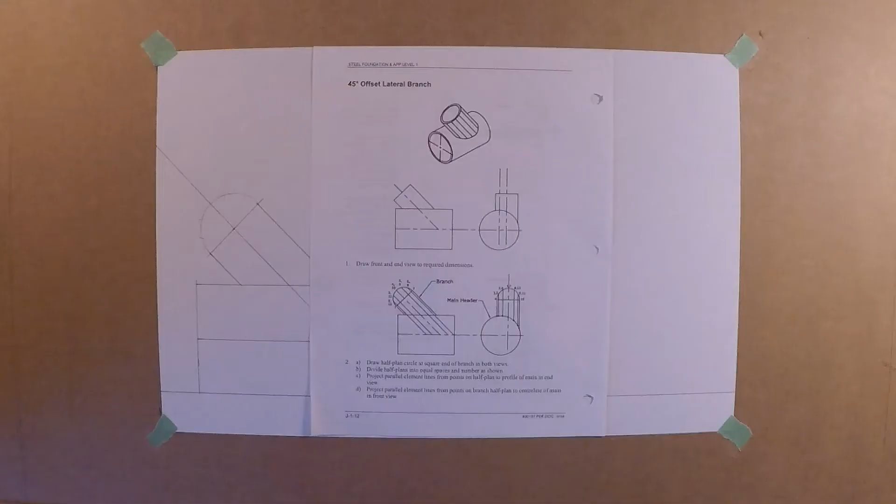Drawing 5, 45-degree offset lateral branch. Very similar to the last one - it's on a 45-degree slope to the main body. They call it the header. But this one's going to be offset, off center. So it's twice the work to make the stretch out for this because it's not symmetrical.

So there is a step-by-step here on page 12. You can go through, and we'll use the same numbering on the way through here. And on page 28, just below number 4, we've got number 5. We're going to use all these numbers on here.

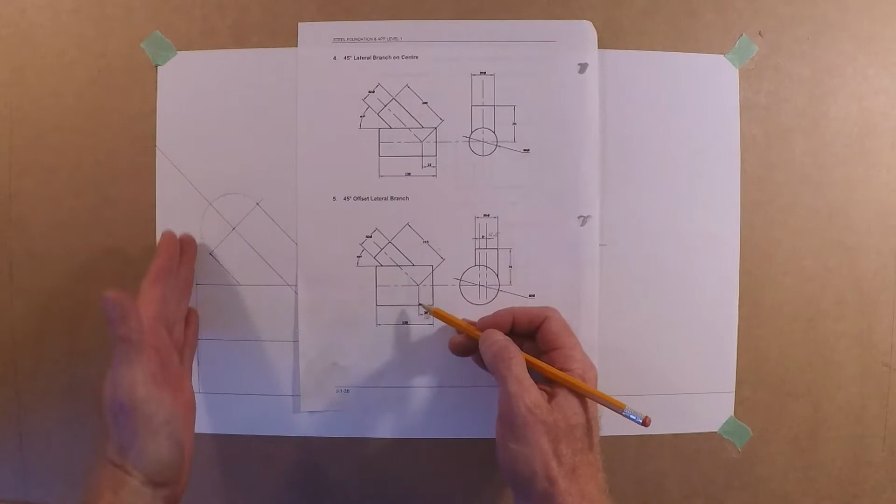You're going to change up a couple here. Instead of the 30 here, we'll use 10 just to pull this back a little bit so it doesn't overhang so much on one side. So we're trying to save a little bit of space on the paper. And instead of the 8 millimeters here, we want 12.5 - that's really important there.

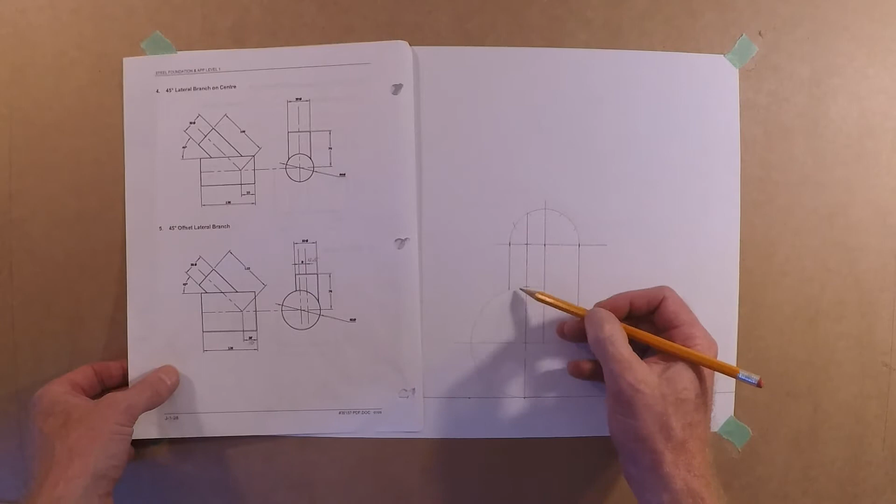We pulled it back, and the reason was because this ended up landing on center, which just eliminated an extra line on here because it's going to get really busy with lines. So we need to drop all these element lines down. That helps with that. The rest are good here.

So pretty similar to the last one - 120 for the length here, 115. That's going to work. I know the last one was 100; this one's a little bit longer.

It's an 80 diameter and a 50 diameter here for the branch. Now this height here of 70 really doesn't matter because it's just element lines anyway - we're not taking any lengths off of here. It's just an intersection. For this one here, we're going to do the same.

We're going to try to put this pattern off on this slope here, the same as the last one, and do the whole pattern, which isn't going to be fun just because of the amount of measuring and stuff we're going to have to do here. So let's get going.

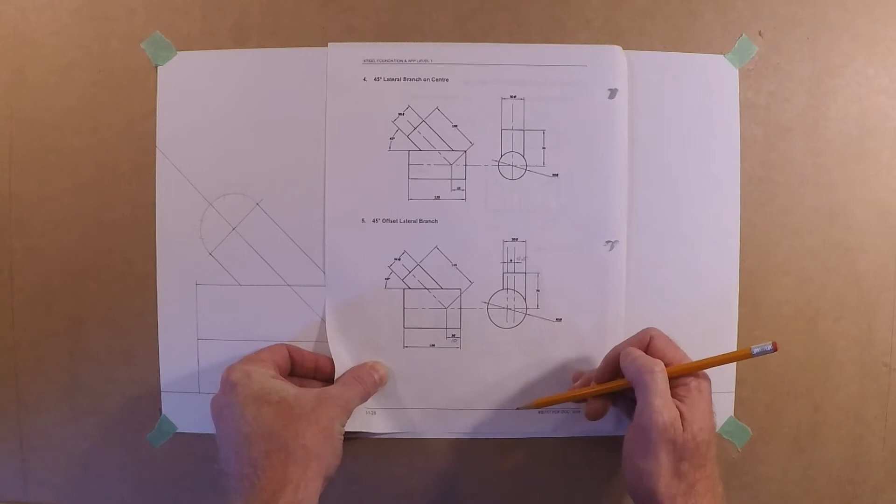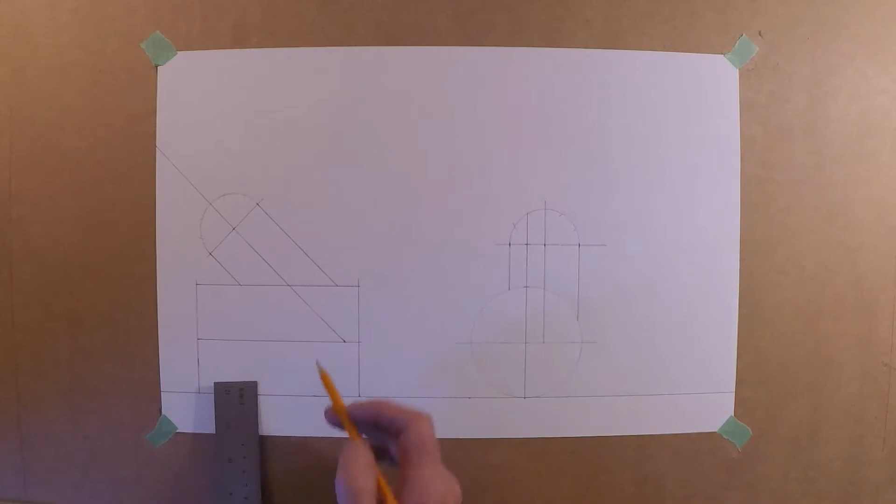So I've drawn a little bit already just to save some time here. The baseline we're going to do the same - we're going to come up 30 with this baseline. It's going to get real close here trying to get this whole pattern down, but we're maxing out this page. So 30 for the baseline for that, 30 for the base, and we're going to come 30 over.

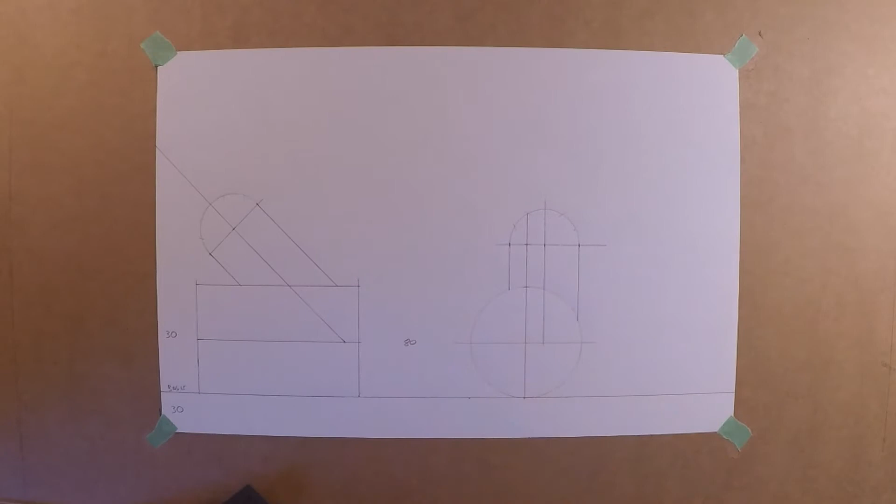And 80 in between - I've shoved it a little bit further that way, so 80 in between there. Go ahead and just double check, make sure everything's correct. You've got your 80 for your diameter, and your 50 for the diameter there and there.

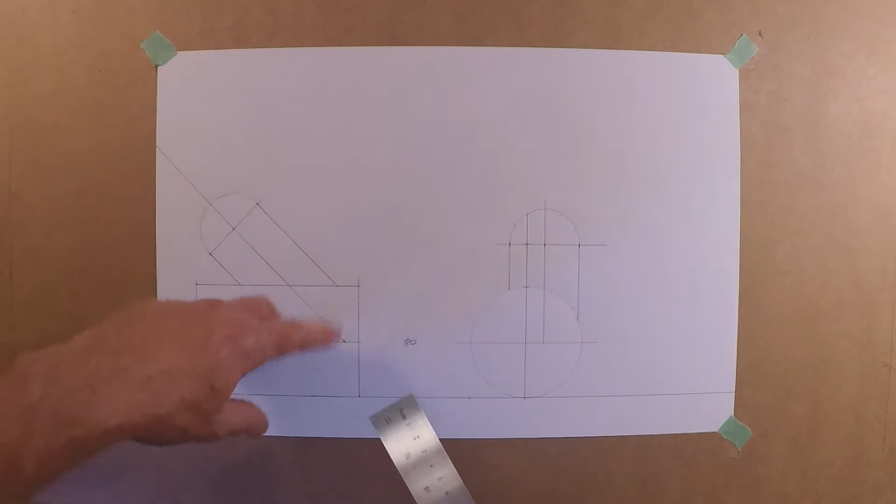You've got your 115 here. So that one's accurate, yep. This is on the 45, so just double checking that. You're going to need these half circles here coming off either side just to get our element lines on.

So let's get going, we'll do this pattern here first. Let's bring these down to the cylinder, and the outside one where it touches - that's it, that's done.

The next one here, like I said, just where it touches, and we'll number these later. I don't get all tangled up in the numbering here sometimes - sometimes I don't even number. If you don't have to, I don't even worry about it. But the numbering confuses a lot of people - it even confuses me sometimes. It's a lot of numbering.

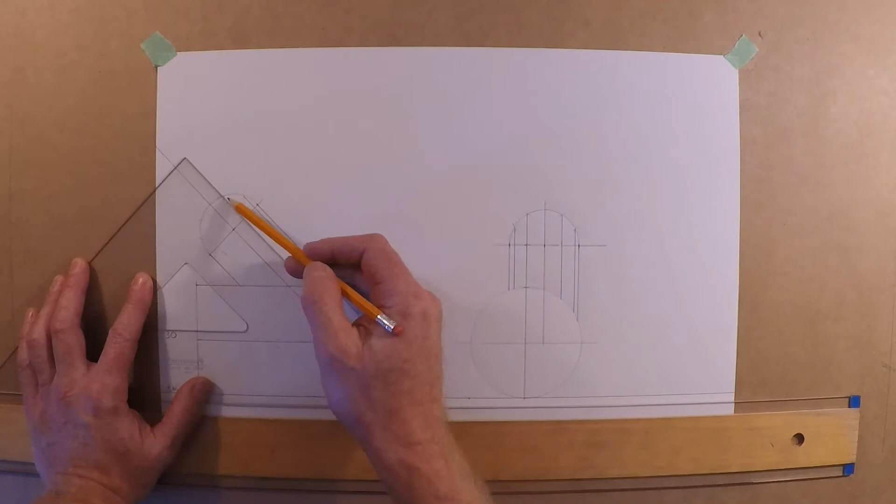Sometimes it's easier just to go down one and over one because we're just making a graph pattern anyway - parallel line development. Just making sure each line intersects the correct line. We call this parallel line just because everything's parallel line to the line beside it. Parallel line is mostly used for cylinders, anything round that's cylindrical shape, as you can see that we've done here so far.

Cones are round, but they use radial lines, so that's next year in level 2.

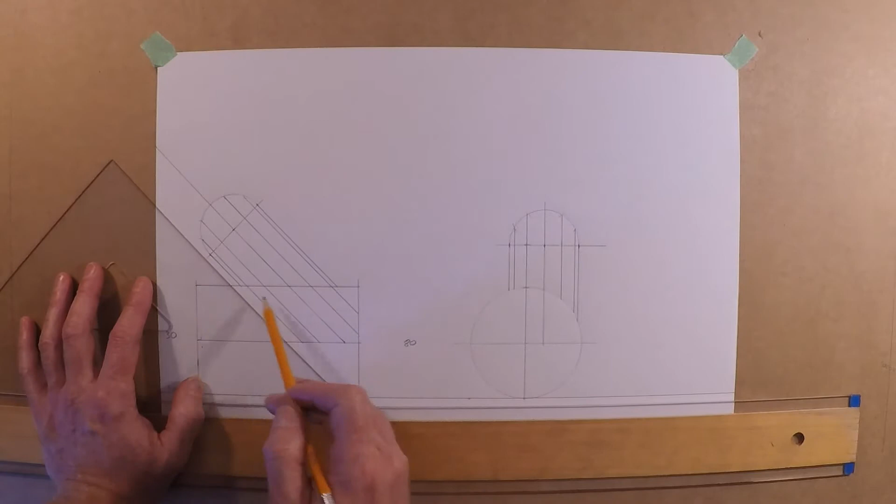Yeah, I just brought all those down there. So the top ones are good at the top there, and then we'll bring these over. This is where it's going to get tough, just because the lines are so close together.

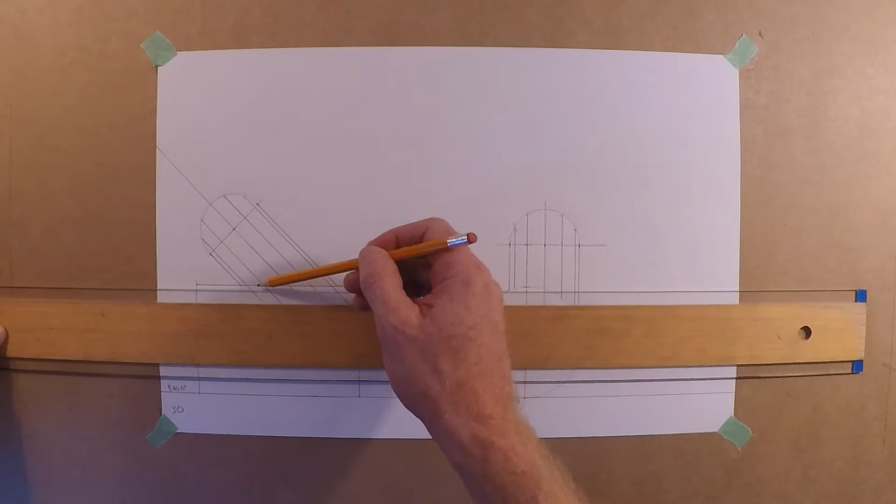So with this outside one here, as it's flipped, that'll be that one there in the center. Again, just making sure you're as accurate as possible - these are going to get real close, really close.

That one's on the top there, and then the top is the top. So really no need to bring that one in, but that is up there. So you can see how close those lines are - they're just extremely close together.

Even this one here, it almost looks like it's right on top, like it just pretty much lines right up. Not going to be much of a difference on that one, so I'm just going to share that one. Looks pretty similar in distance here.

The distance here and the distance here, it's going to be split. It's almost going to be unnoticeable down below there, so I'll just line that one up.

If I did this on the computer in AutoCAD, obviously it would be a lot more accurate. This one here we're dealing with trying to measure in pencils, and it gets pretty tough sometimes.

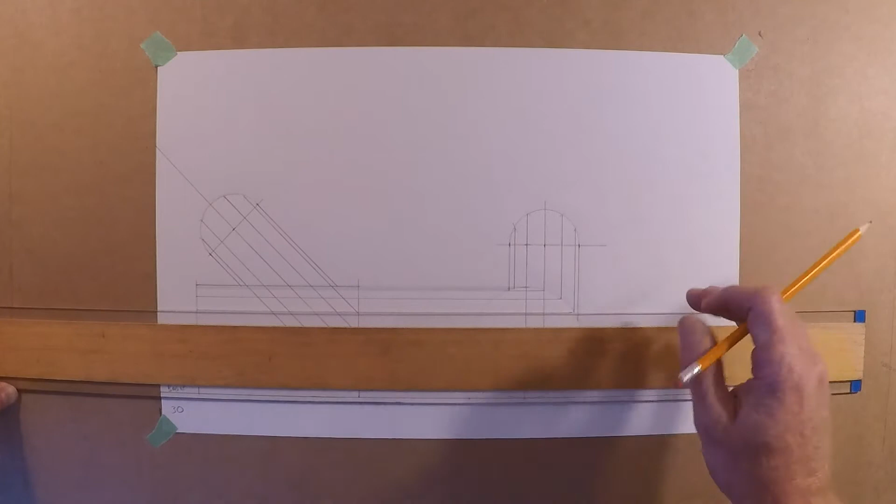And the far outside one, that would be the center one there. I always just draw a little line there just to make sure it lines up. Thickness of my pencil on the T-square, sometimes it just grows a little bit.

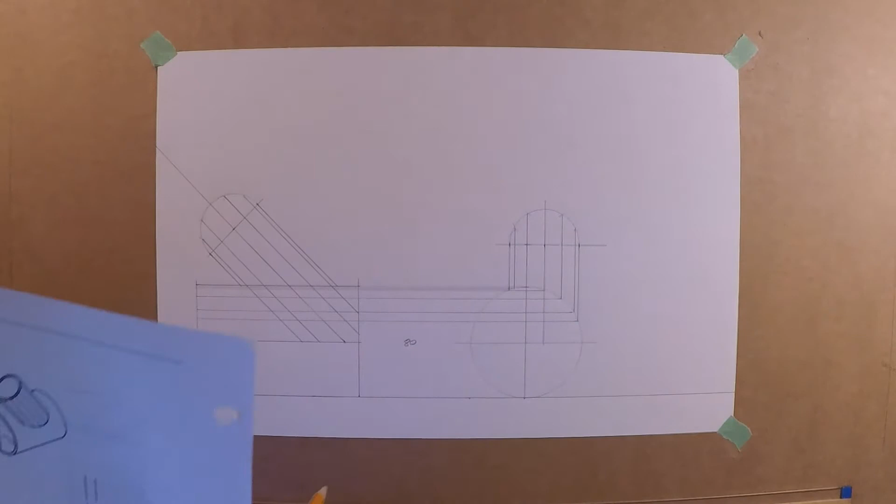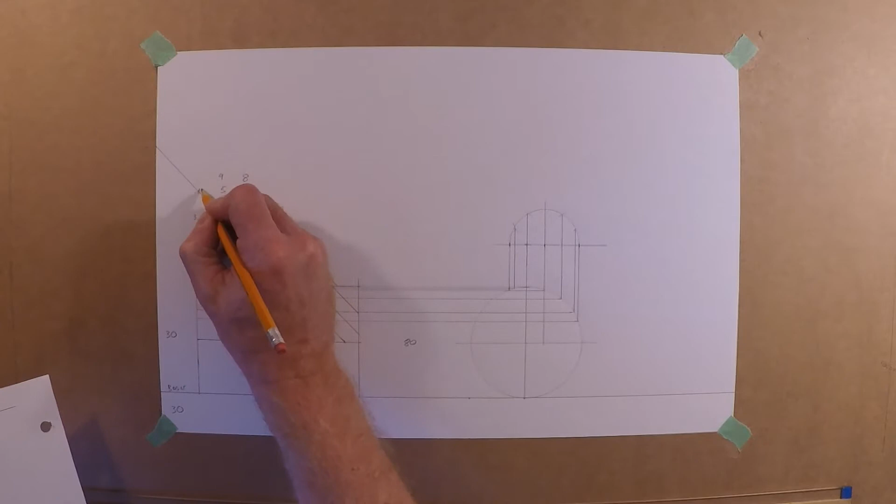Okay, so let's maybe just do some numbering. Don't want to confuse anybody, so I just want to do the same that's in the book here. So 1 through 12 because it's offset, so let's just go ahead and do 1, 2, 3, 4, 5, 6, 7, and then it just comes back the other way. 8, 9, 10, 11, 12.

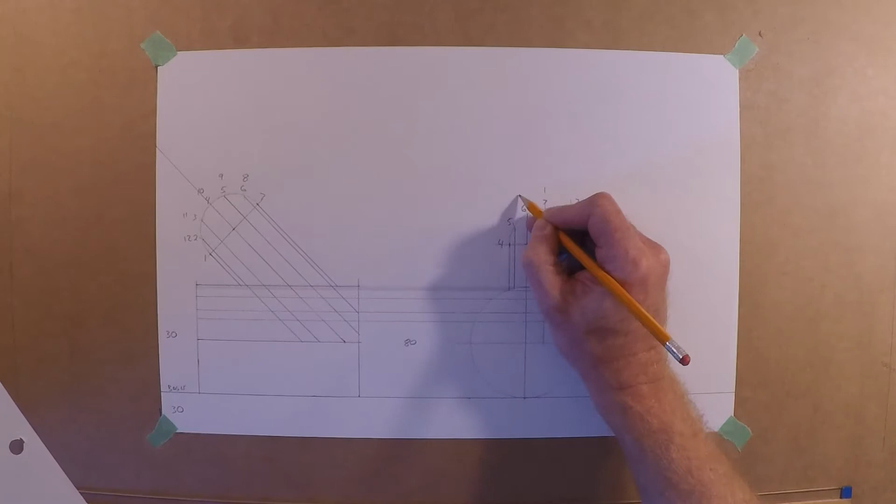And then with this one we've got the 4. 4, 5, 6, 7, 8, 9, 10, and 11, 12, and then we're back to 1, 1, 2, and 3. So those lines obviously share there.

Okay, so let's go ahead and match the 1 to the 1 here. So there's the 1 coming down below here, so it's on the back side. So this line actually even needs to be extended down to this bottom line here. Again, we're going to kind of share this line right here. So this is this line here, on the back side.

And let's go ahead and match 2 with 2. So 2 ended up being right on the center at the top. So 2 is actually at the top here. There's 2. And 3. So again, you're just matching 3 and then trying to find 3, which is the next one down, which is this one.

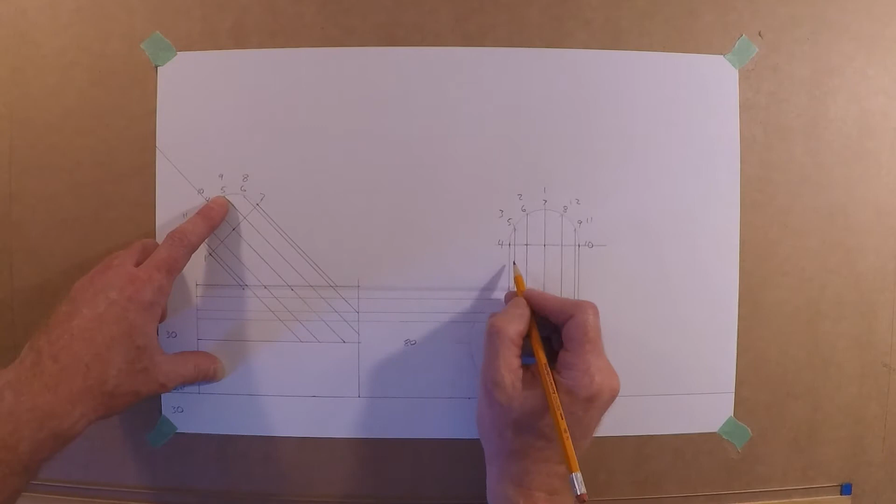And then 4. And here's 4 here. So it's the last one down there. And then 5, second one down. And 6, right on the top. 7, the third one down. Have to extend this line down to here.

Okay, so let's just darken those in a little bit. Real tough on the pattern there. So as it's just coming up over the top, you can kind of see how the ends are down, like 1 and 7, they're down on this back side. They're off the center on the back side. So with 1 and 7 down over here, and then it creeps up on top. So right here, you can kind of see how it creeps up on top, and then it's going to come down below.

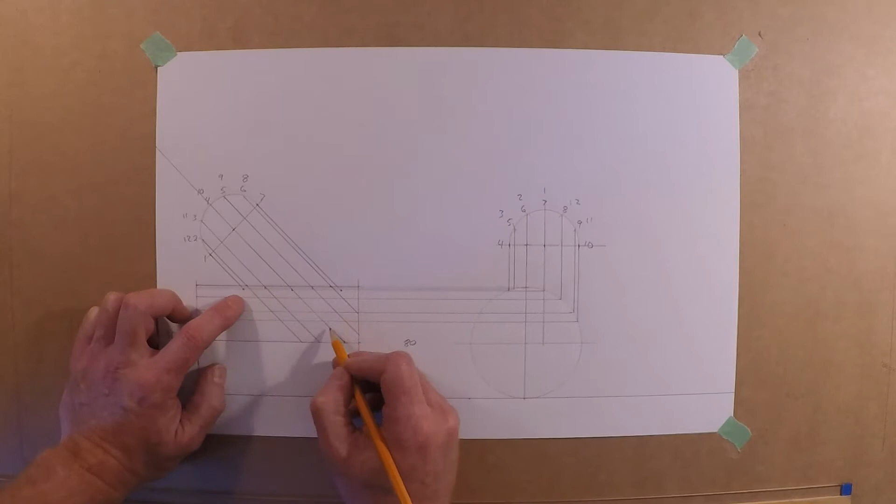So let's go ahead and do 8 here. So these ones are going to be a little easier because it's not so far apart. So there's 8 there. So let's go ahead and do that. 8 and 8. So this one comes over and it's right there. So 7, 8, and there's 9. Again, we'll just match this up to the other side. There's 9. And over 1, down 1.

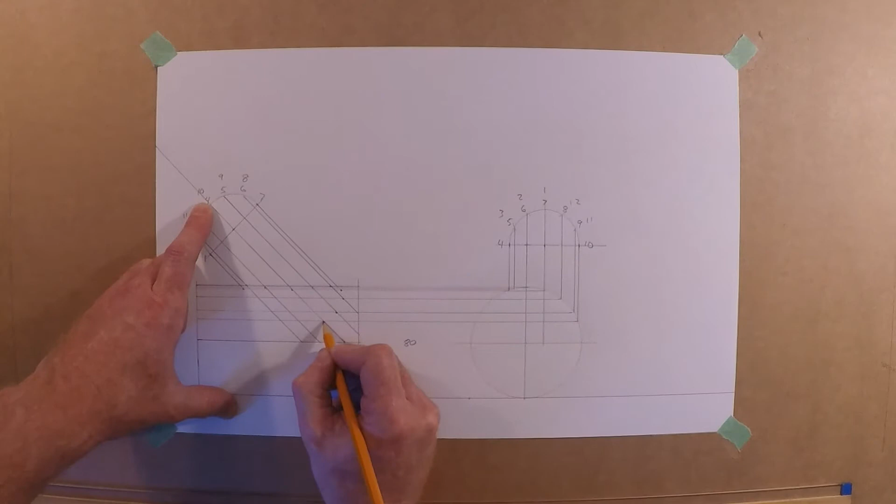Number 10, all the way down at the bottom here. It's the furthest one. So right there. Number 11. So just tracking this across. Number 12. And we've already done 1 up there.

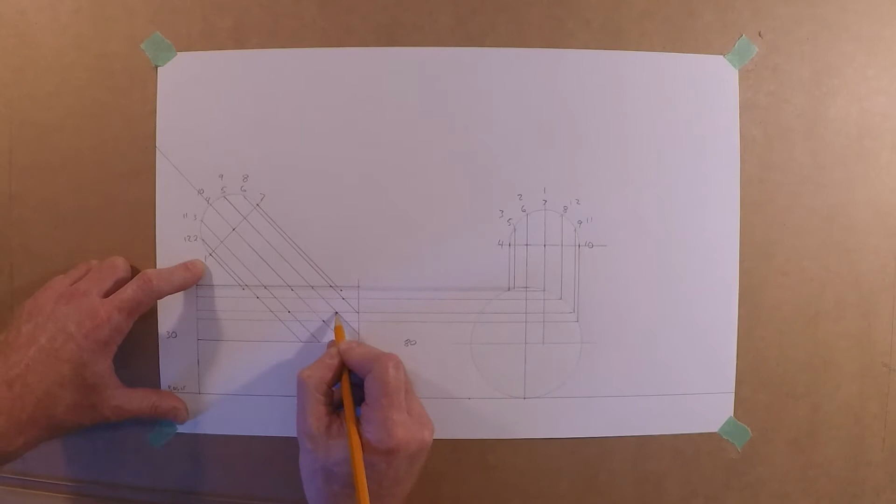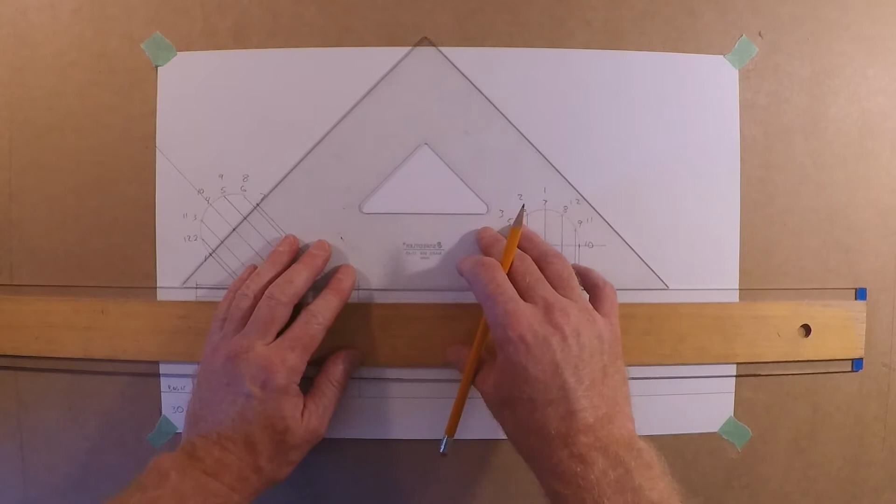Alright, let's go ahead and make the wrap for this, as accurately as possible. And this is the 50 again, so we're just going to do the 50 times pi. That'll equal the 157.

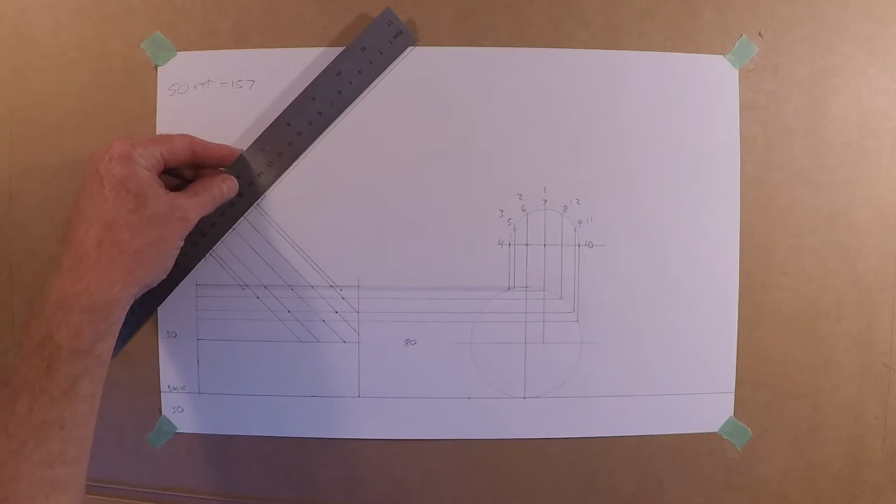And let's just double check that it fits in there, and it's pretty much right on the corner. It doesn't get too much closer than that. Let's see here. Just down about 1 millimeter. Just barely fits on the page, but it does.

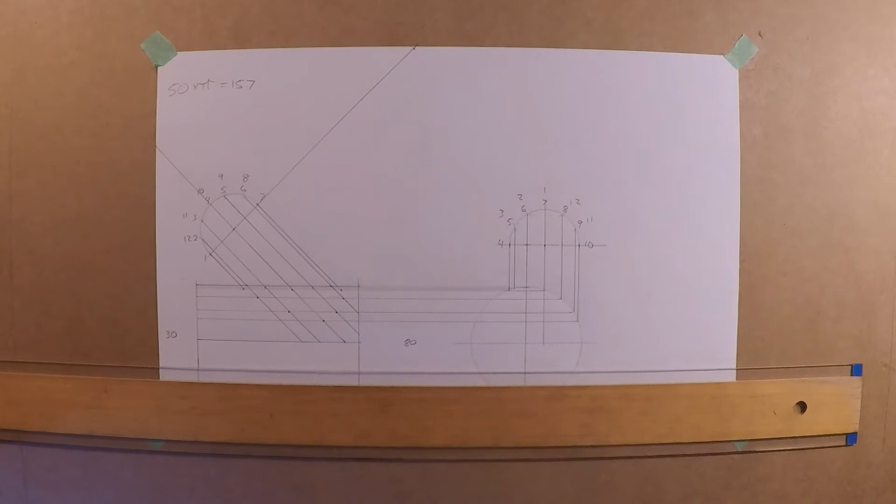Actually, before we do that, and we've done this before, so 12 spaces times 15 is going to equal to 180. So we're going to keep this here and go to the 180 mark.

So we're going to need to extend this line, or not, unless we go the other way. That might even be better, then we're not drawing over top of a drawing. It's already busy enough down there.

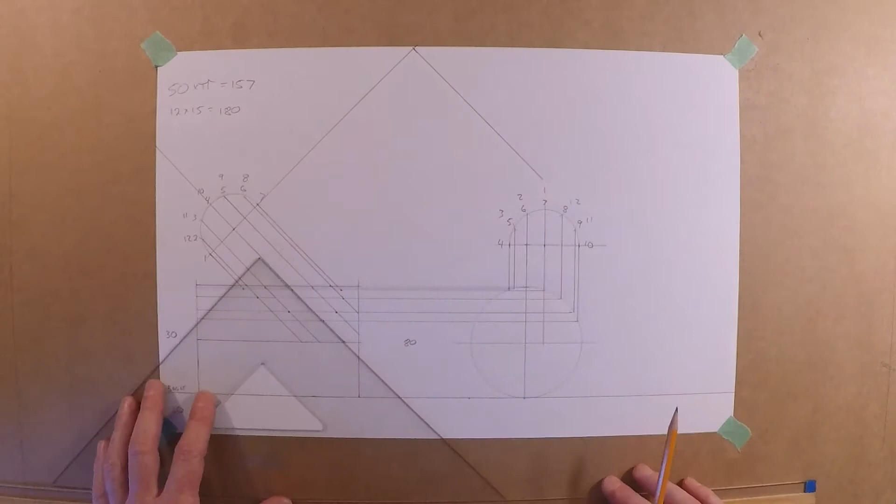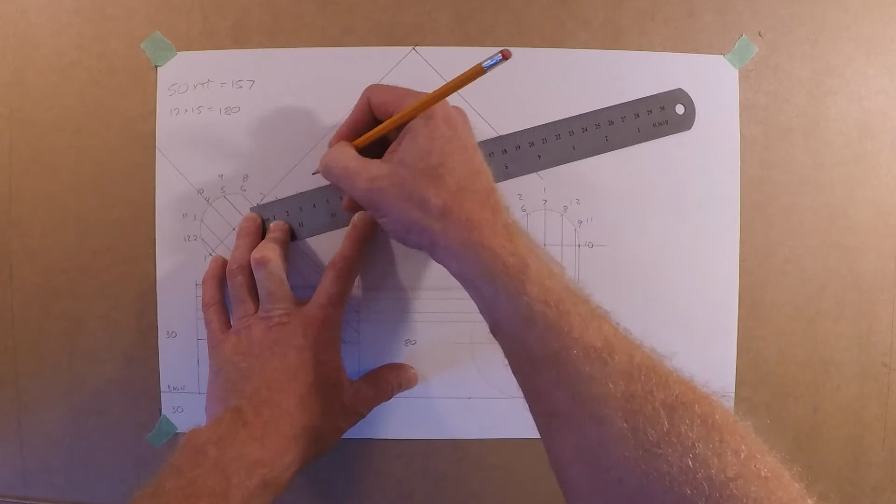And there's the 180. And again, just mark 15 here. 15, 30, 45, so on and so forth. Every 15 millimeters.

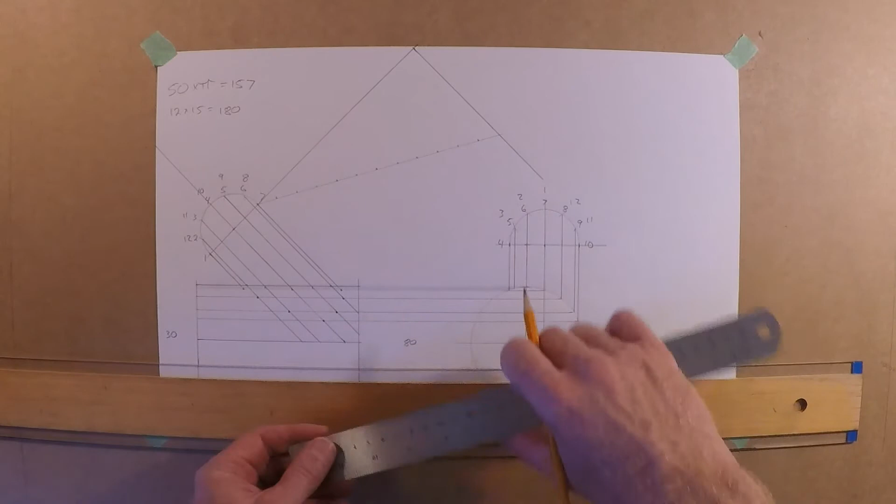Okay, let's extend those down. This is going to be the longest one here. So it looks like we're away from that other drawing, so that's a good thing. So I'm just going to make these about this long, so just that's the longest one there. So I'm going to bring them down fairly far.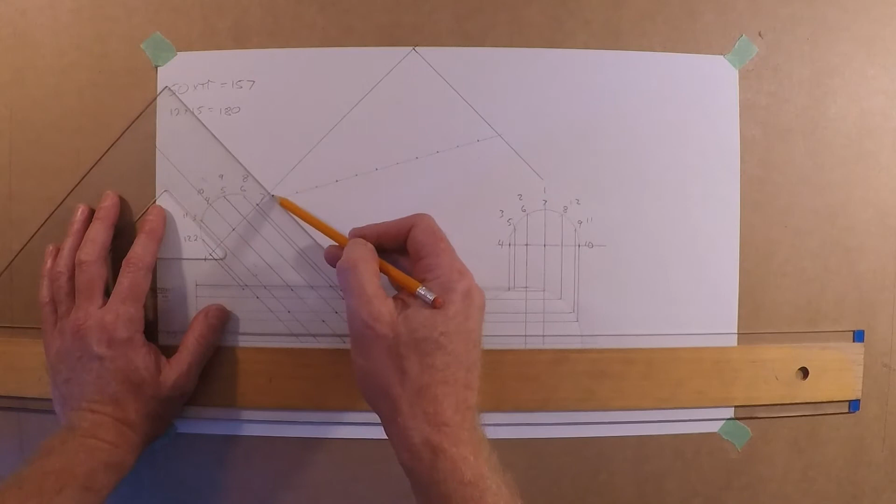Right up to that baseline. And then just all the way down, as long as they're past the longest point there. It doesn't really matter.

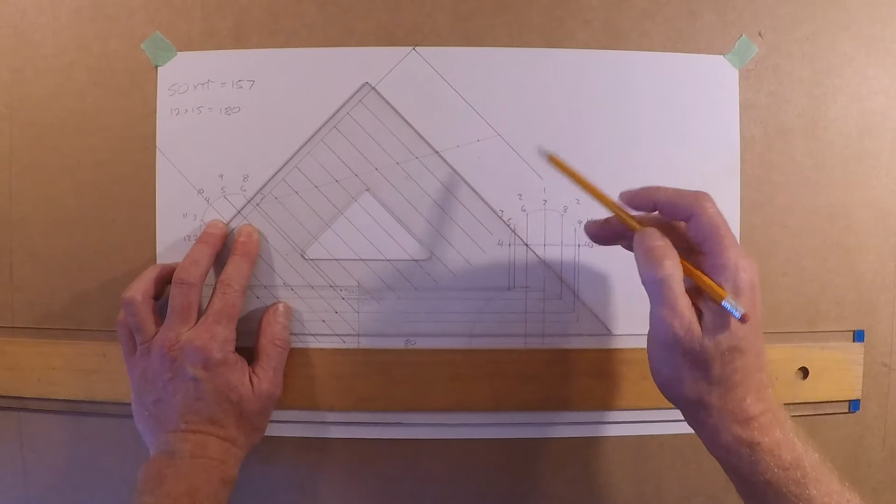Okay, now we should still keep the shortest one. Wanted to double check - yeah, so they went with the 1 on that one. So we'll number 1, 2 all the way across, the same. Let's just get rid of the 7 here. We know the 7 is there, but we're going to have to share that with the 1 as well. So using here, 2, 3, 4, 5, and then 1 at the end.

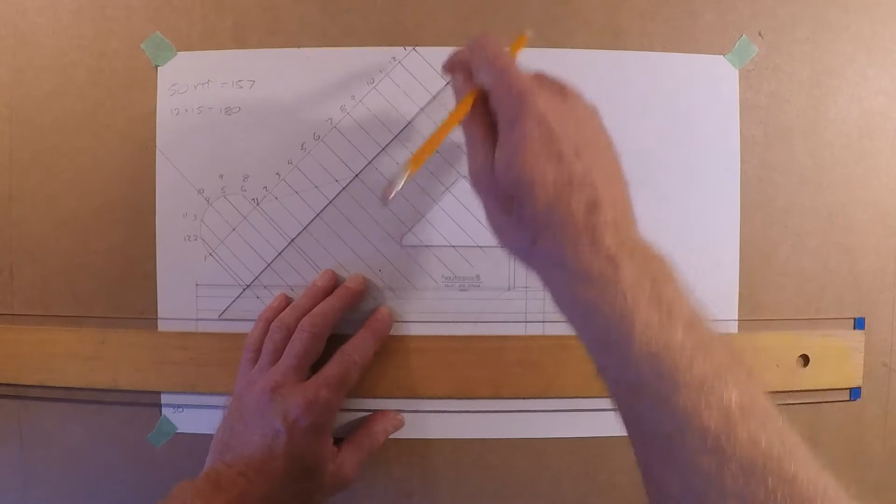Okay, let's connect the dots here. So 1 with 1, and this will be an individual line for each one. Make sure you pick the 1, the 1 spot, and you got the 1 on the other side - just remember to do that. The number 2 here, pretty close, it's just up a little bit. These are different all the way through, right?

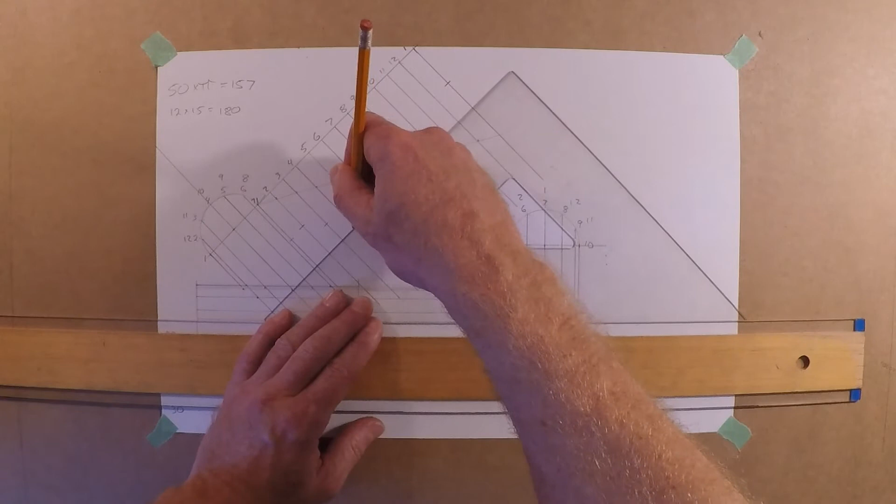Let's find the 3 - here. And the 4, and again, you're just matching the 4 to the 4. There's the 5. It's good to have good lighting because you get a lot of shadows off the squares. So a little bit of shadows here, I know, in the camera, but doing the best we can here.

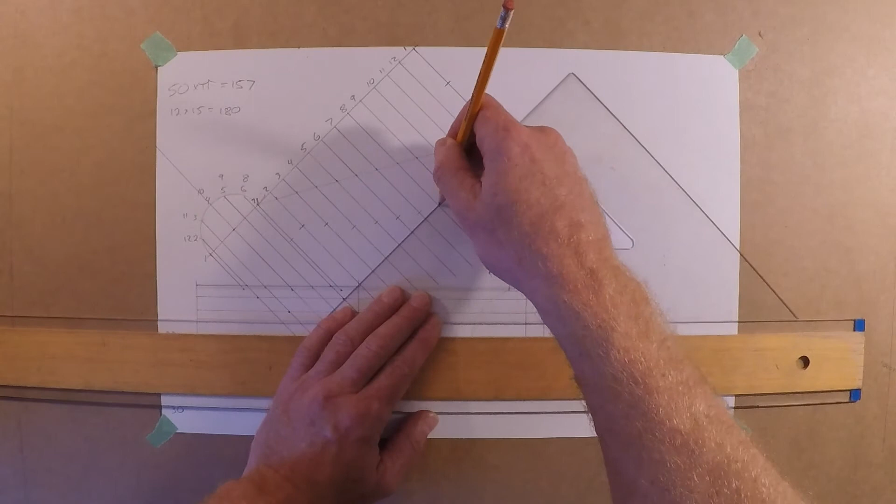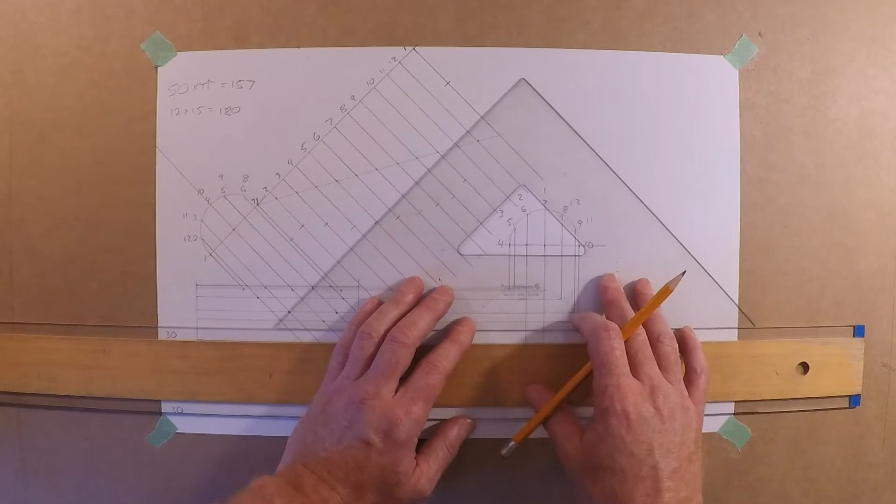We got the 6, 7 is here. There you go, I'm just trying to be accurate here. I get a little longer at 8. There's 9. 10 is just back a little bit, and it's going to start coming up here real fast. There's 11. There's 12.

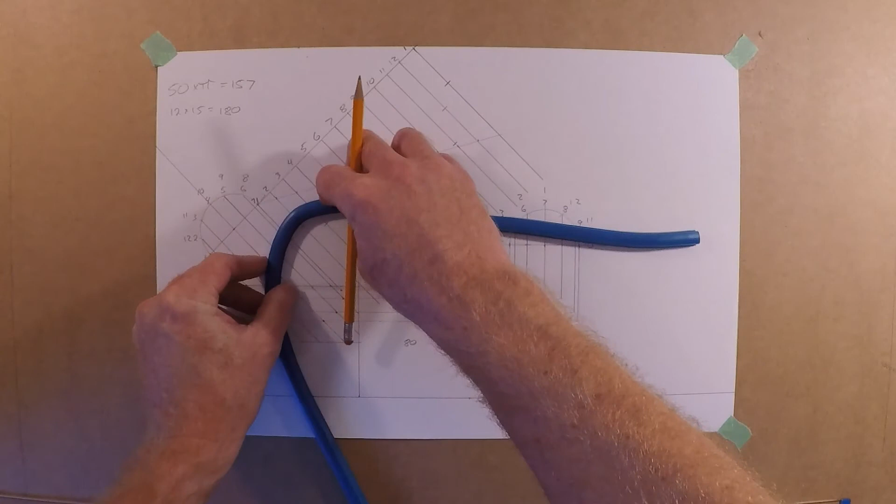And there we go, we'll snake that in - as always, that's always a fun part. Make sure you grab the correct side of your snake. And again, we're trying to bend this to line up to these lines as close as possible. It's probably part of the video where we can put in fast forward.

Like I said, always a challenge.

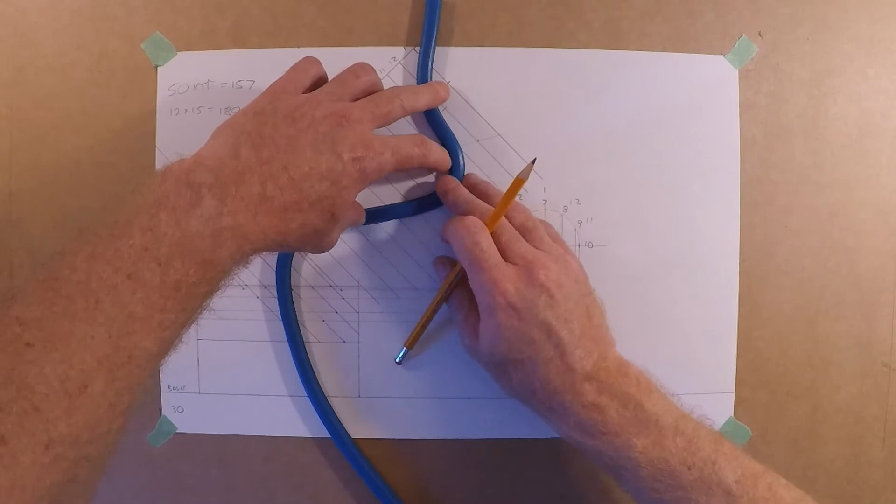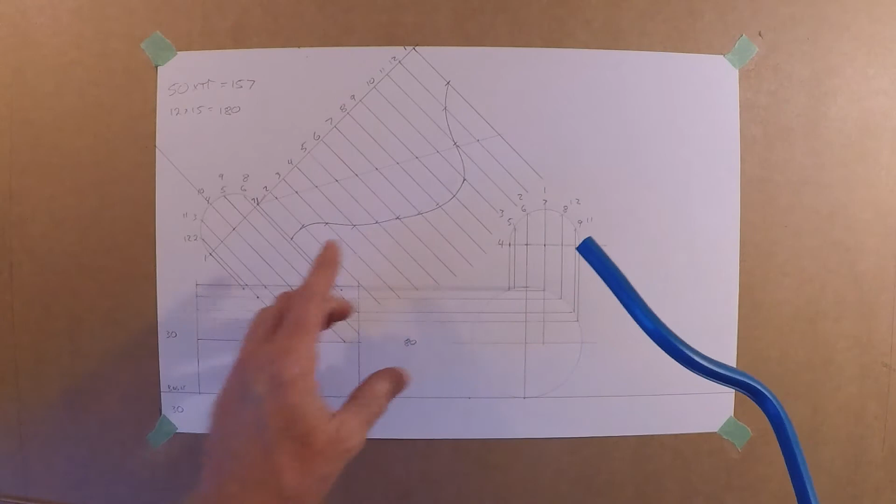There we go, a little bit off there, but we'll live with that for today. We'll identify that after, but that's our stretch out for our branch here.

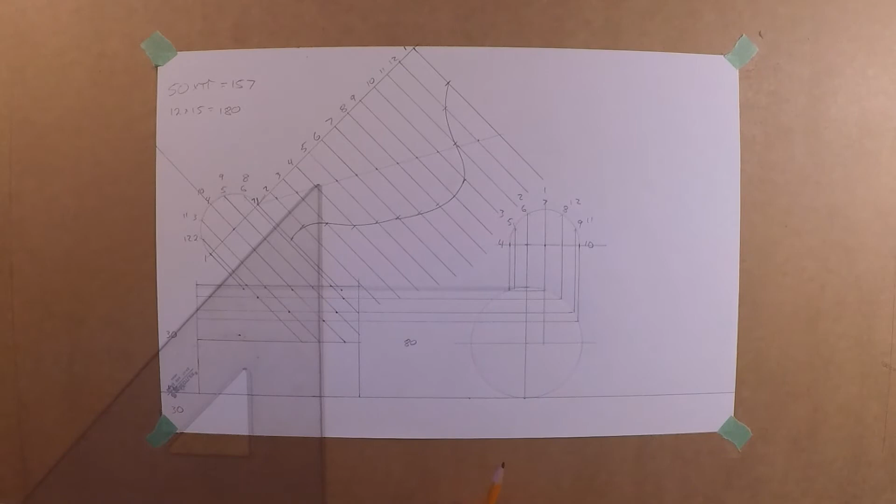Now let's go and see if we can go ahead and do this whole pattern. This one here is going to be a tough go. They make it look easy in the book, and it is not, just because it's so busy here with lines. And we're just dropping all these lines down to the bottom, so take every one of these points here and just bring those down. Some of these might end up doubling up if they land on top of one another. Always a tough go. There we go.

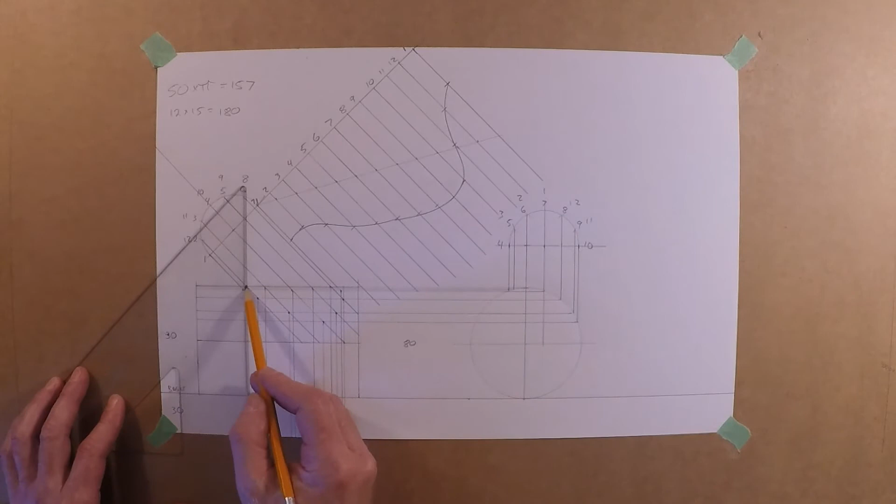And again, we normally don't always do a whole pattern for these, just because we'd end up just sticking a branch on top and tracing around it. Sometimes the easier thing to do, but if it's large, it's difficult to do. Sometimes you can just put in 4 points to line that up and then go from there.

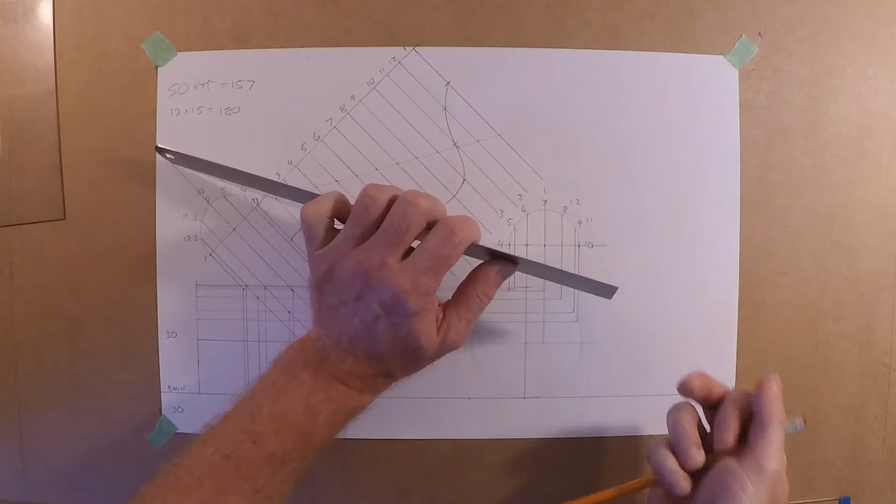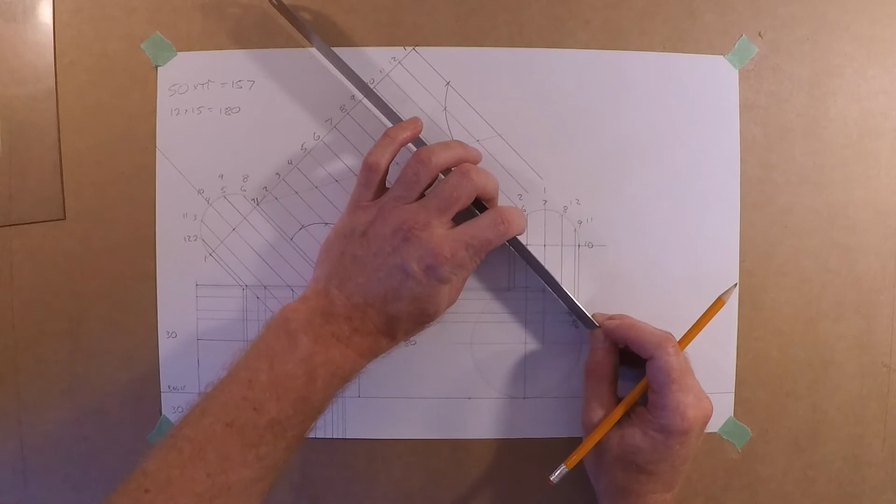Okay, so now the fun of trying to measure to each point on the way around here, and I don't have the most flexible ruler. I'm going to say that's 36, and I'll go with 28 on this one. And we're measuring to center here, so the 1 and the 7. So I had to double check there.

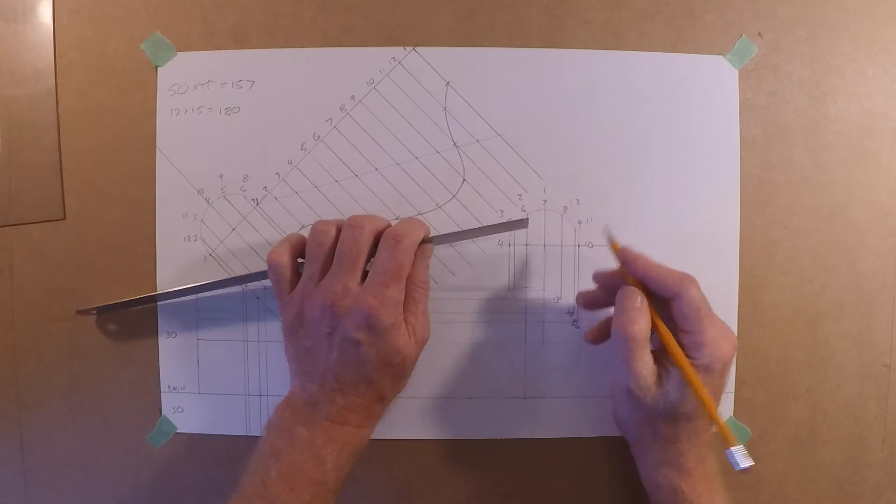This is almost the same as that last drawing. I'm going to say 13. Is that the same distance off center? So that should be similar-ish. Yep, 13. 22. And oh, it looks like we're 26.

Okay, so now we're trying to divide off here. So number 10 is 36 over, so we're going to take the 10 here, where that would be. So number 10 is over here, so matching the 10 and the 10, and I'm going to put the bigger side on the way up here. Okay, so here's the 10. At the 10, I'm going to come up 36, which is here, and that'll be the longest one.

And we're going to have to go through and just do each of these here. So 9 and 11 are going to be 28. So 9 and 11 here, so you're coming down to find 9. There's that one, and we're going to go 28. And 11, which is the longer one, the lower one, and 28.

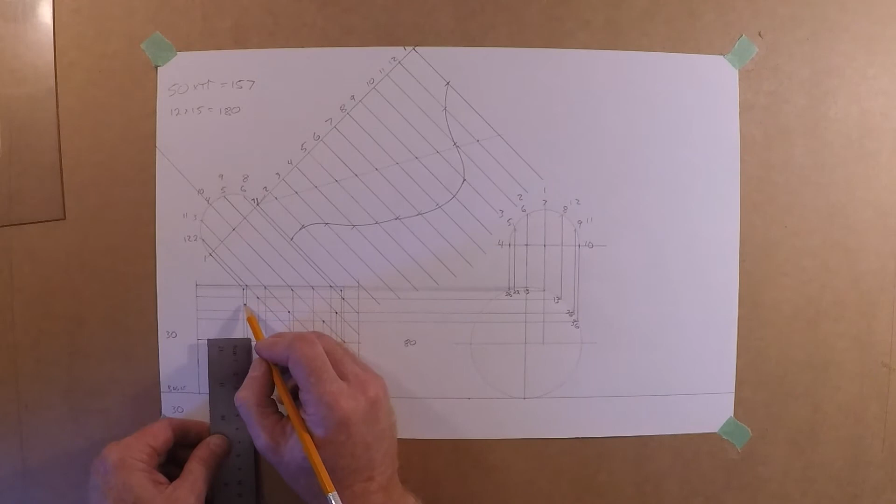And number 12, which will be this lower one here, 12. That one's 13 over here. Number 8 on the other side, so we got to do the other side here. 8 over here is also 13, so following this down, making sure you're on the 8 here, so that's the furthest one out. That's going to be 13, right there. Okay.

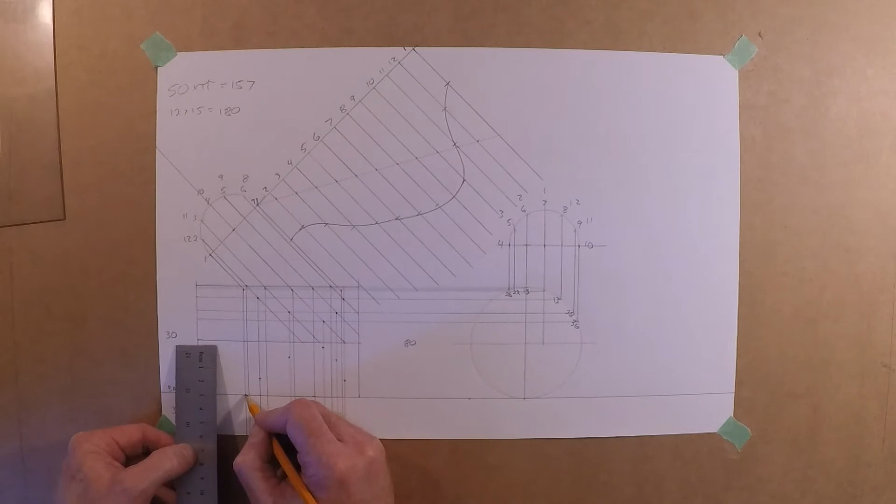So now we're done the 8, so we can go to the 1. So here's the 1 here, and the 1 is right on the 1 here, so there's no dimension or anything coming off of that. So everything is coming from the one here over - we're just measuring over from that.

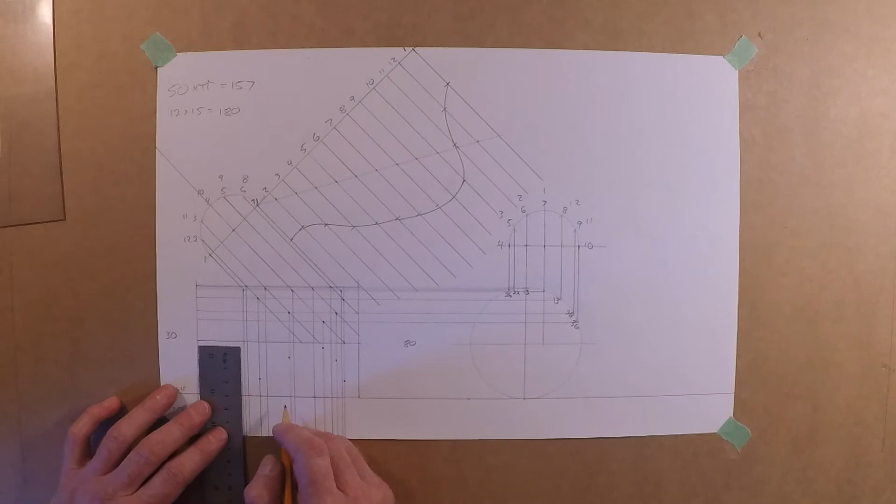We'll go to the 2. That one's 13. So here's the 2 here on top. The 2 will be on this back side here. So there's that 13.

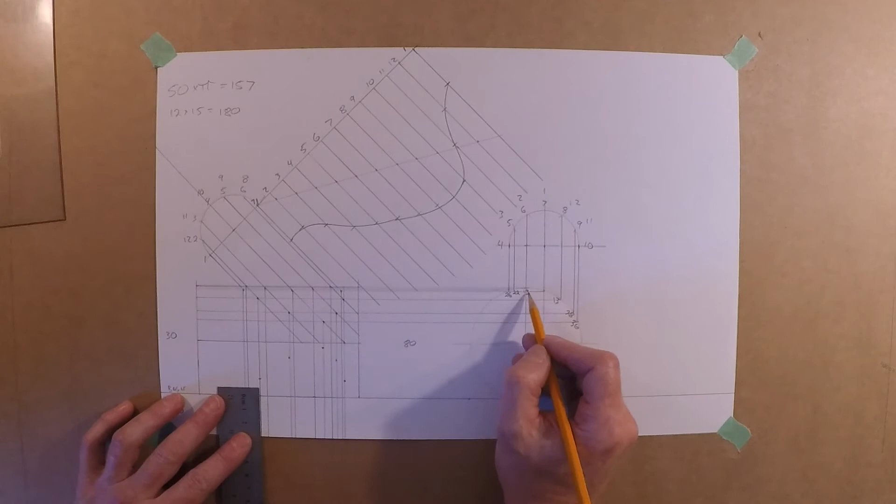And so we've already done the big side. We're doing the 3 here. There's the 3 here. We're doing the 22, 13. Let's just make sure we've got the correct one here, the 3s.

Up here. Oh, sorry, there's the 3 there. 22.

And 4, it's the 26, so here's the 4 here. And off of here, so we're going to go 26 on this one.

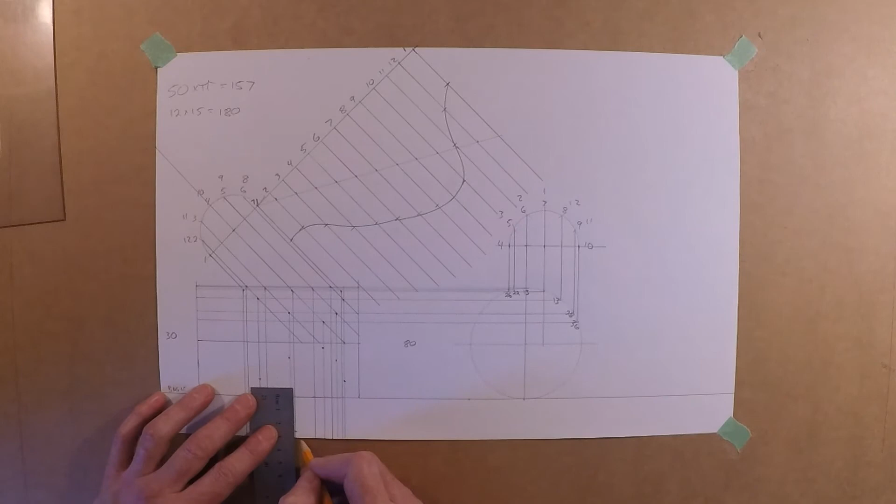And 5, we're here on this one. We'll do the 22.

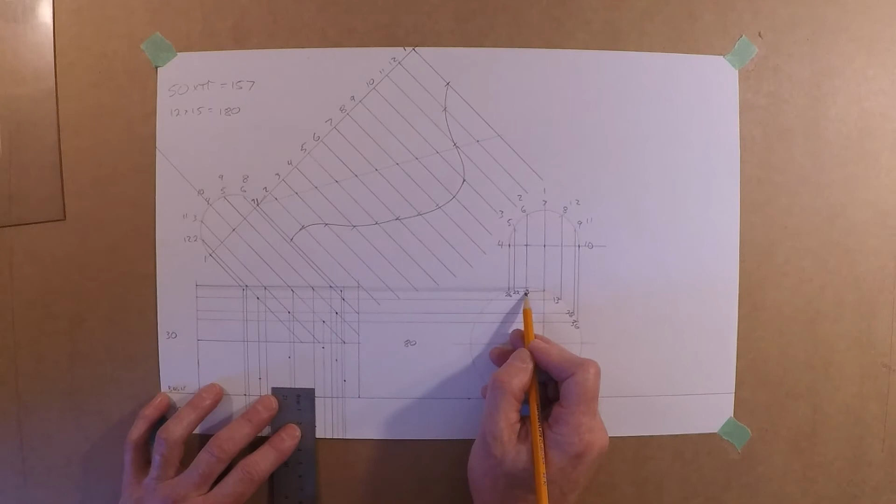And the 6 here, that's the 13. There's the 6 up here, and that's the 13,

And then up to 7 here. So 7 was here at the end, and we're just going to go to center here for that. Okay, so it's a bit of a blobby looking shape there, but it is a shape.

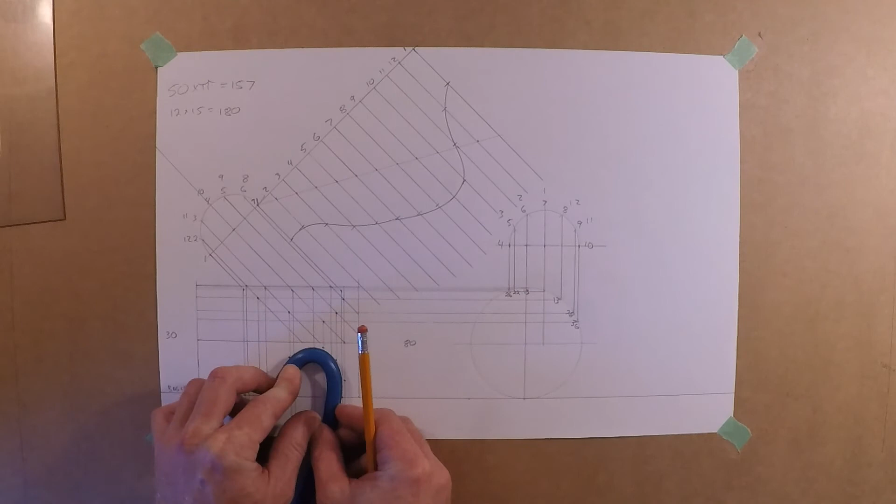We'll go ahead and try to pen this in the best we can. Obviously not going to be easy. Oh, that one looks pretty close. Just going to do the best we can here just to try to save a bit of time here too.

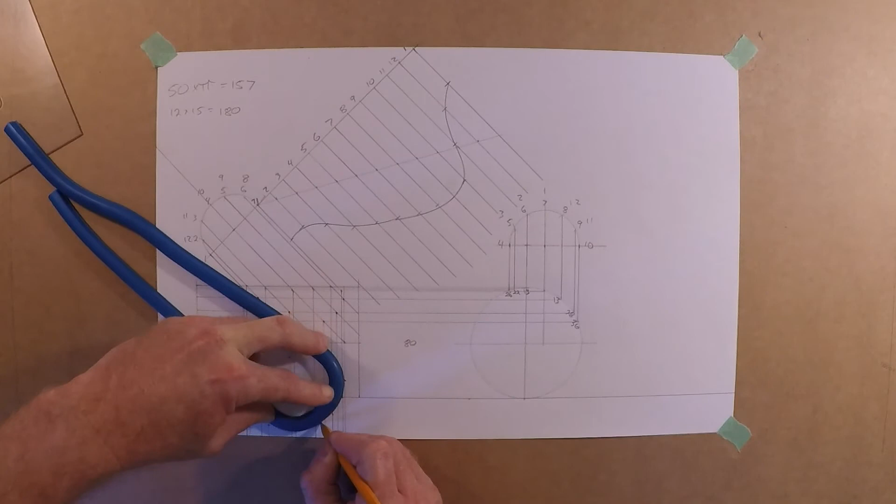Again, this is the part you might almost fast forward here just because it's a little slow. Let's connect the dots.

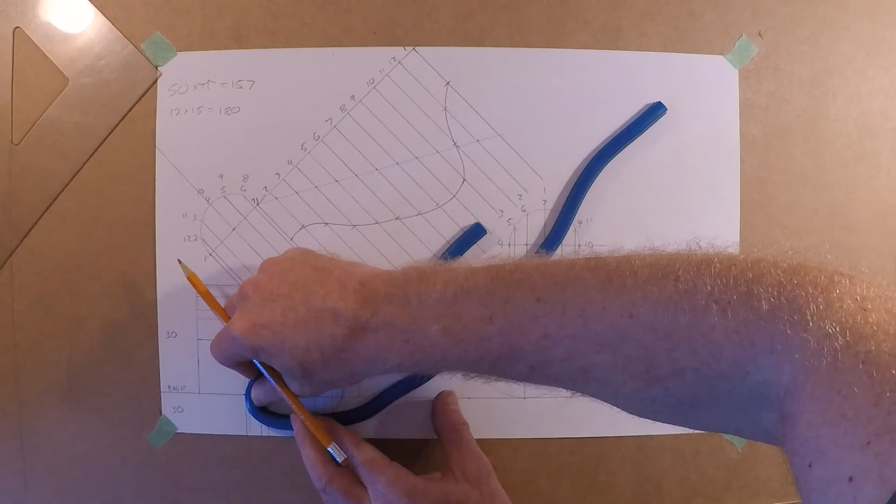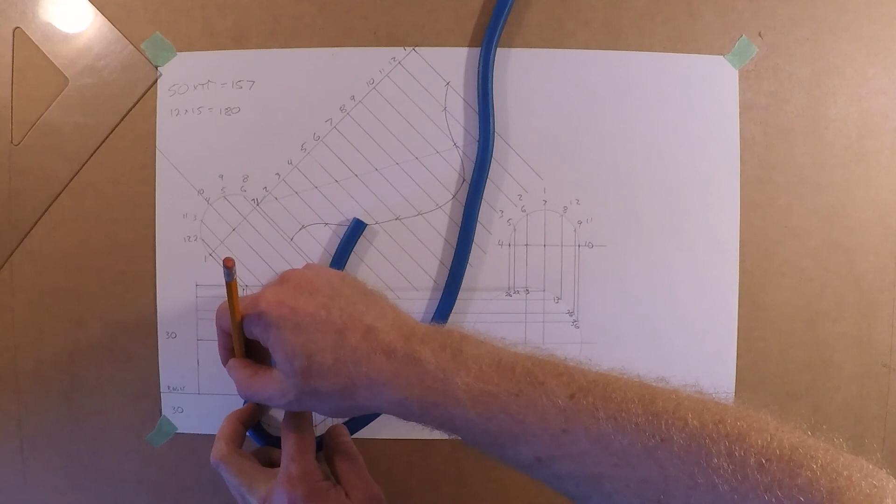Last one here. Alright, so there it is.

Let's identify this. It's a bit of a long drawing, I know, but it won't take longer than others. And identify here as well.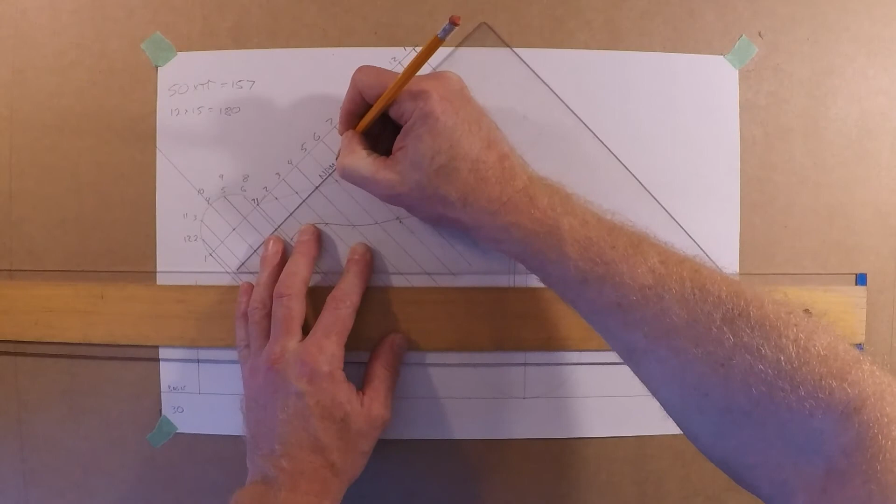Again, put your name, the date it was created, your project name. This one was a 45 offset lateral.

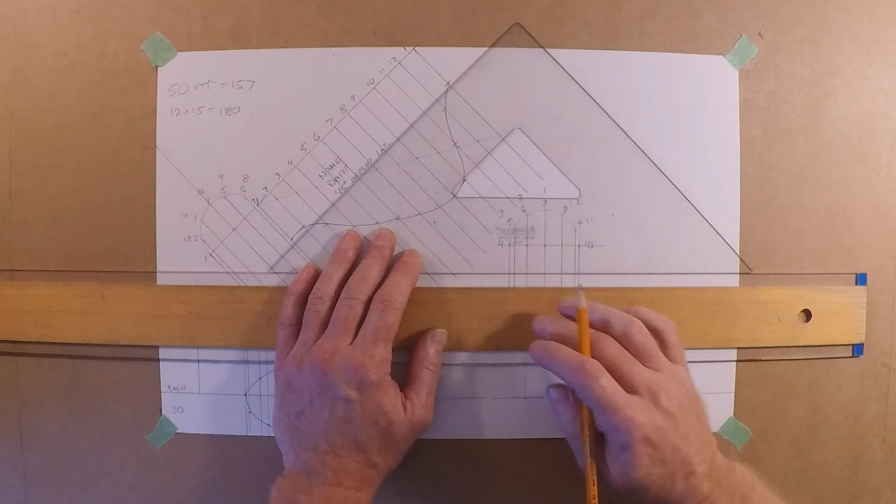Branch, I guess. We're on drawing 5.

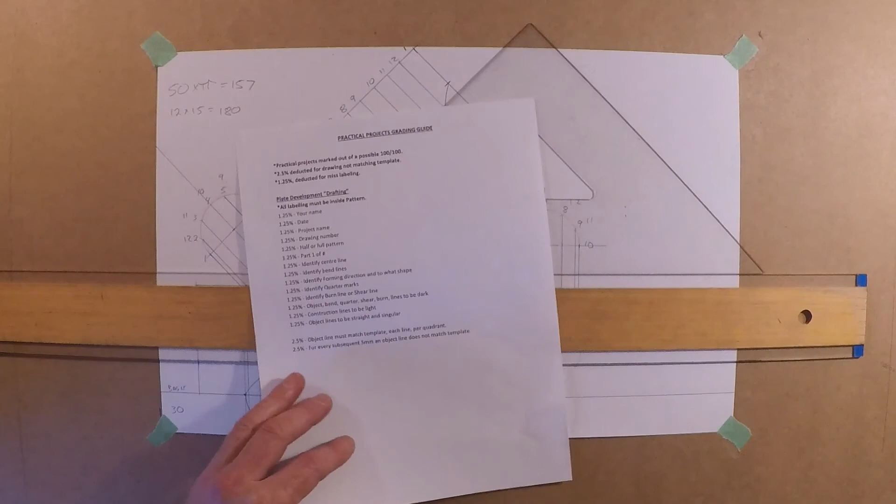Again, I'm just going through the list here that you guys have here. Full pattern, center lines, bend lines, so roll direction. 7 will be center. And we're going to roll to 50.

And again, if you were to roll this in the plate rolls, you would have to roll this as a cylinder, and then you would cut the shape after. Put some quarter marks on here.

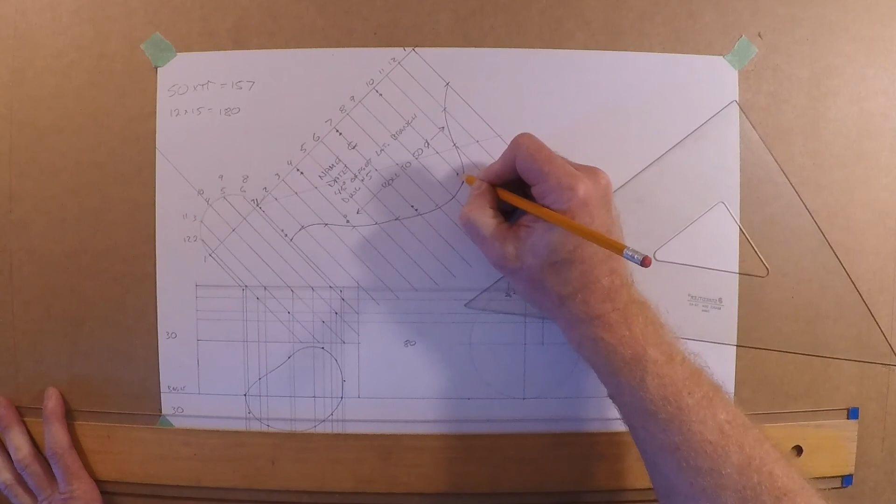Some shear lines, burn line, and that pretty much does that one.

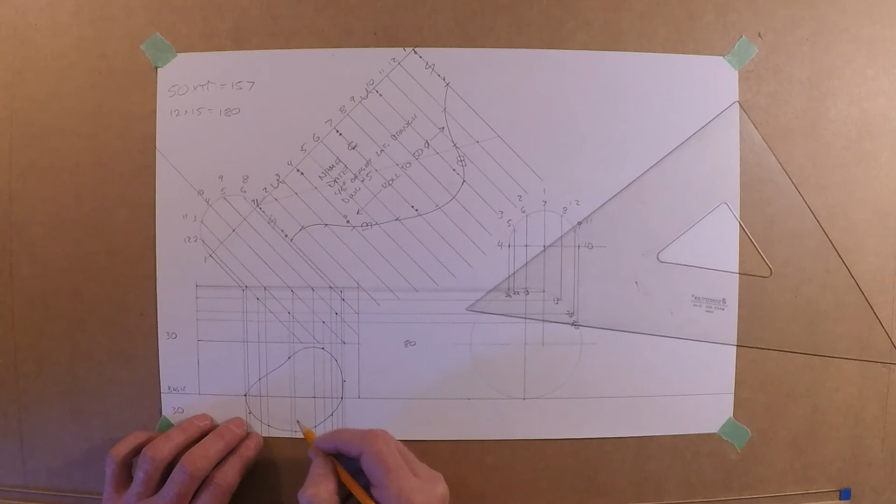Over here we'll have a center line coming through this way, so this would be a center line, and we're going to use 4 and 10, I guess, as the other center lines. So we kind of have 2 center lines on this one, so depending on how you line this up, 4 and 10. So 4 is down over here and 10 is over here.

So how are you going to create a center to get this pattern on here? That's the kind of bit of the difficult part. That would be the same as, I measured off a center here

for this pattern instead of the center line here. So I could have actually measured off of here, and we could have done another center line on here and pushed this one out. But now what we're going to have to do with this pattern is we'll have to come off this 13 mils, draw a line here to line this pattern up, because we've used this as a center line here and here.

Also it created a little bit of space here that it saved. If I came off center, I would have been a lot higher up, which still would have worked, but so just lining that up on center there is what we did for that one.

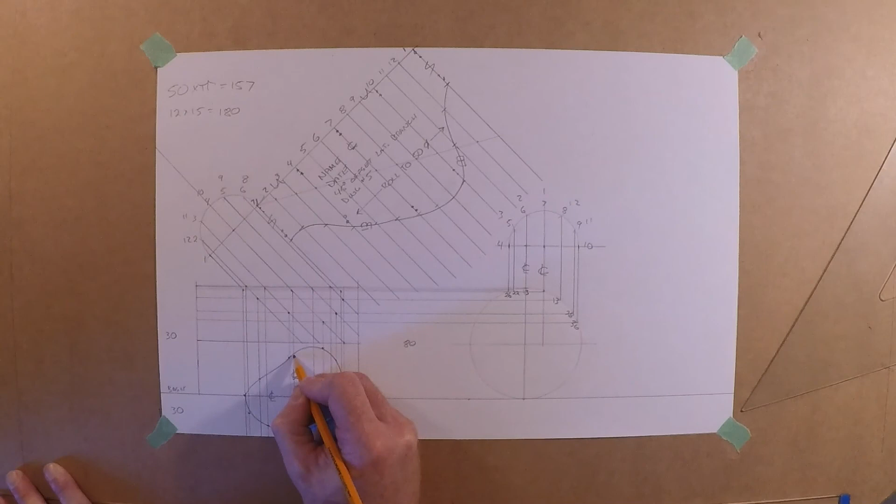So just using our quarter marks here. I guess we got 2 center lines really. So this one here could be a center line as well. Just marking up on the other side.

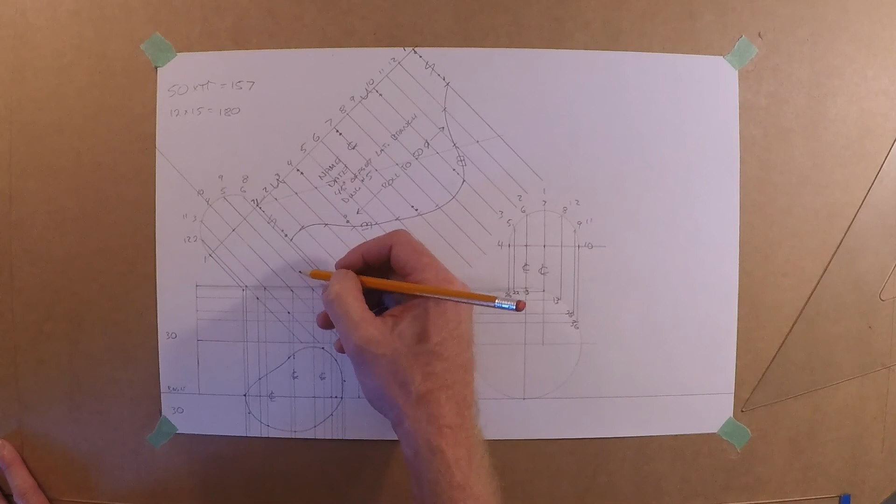Okay, just maybe be able to mark or lay that out on center where that's going to land on center. The other thing I guess you could do is you could create another center line off of center, and you could use, say, this line over here from center, because then you can just measure from the end over, draw

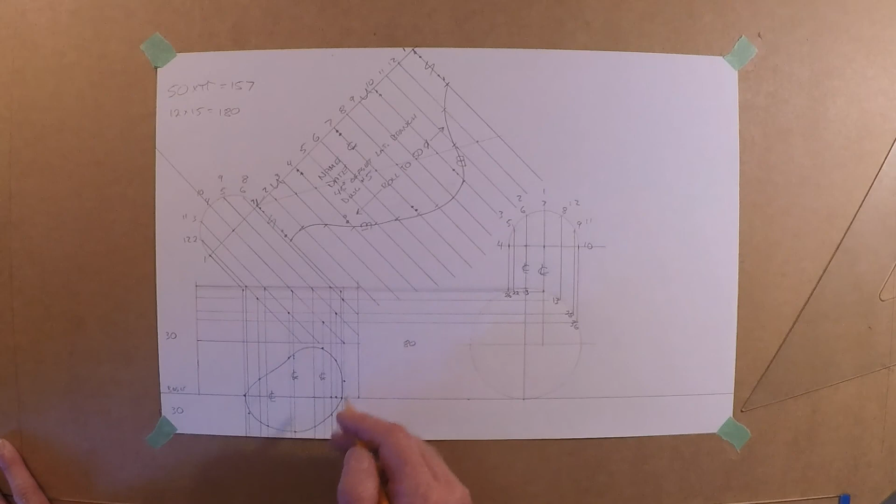a line, go that way. But it really doesn't matter if you measure from the end over this distance, just to get the line, just a line, get your distance over there so you're getting in the correct location. So just a couple quarter marks there.

And then once that's done, you can check your pattern, making sure your pattern fits. You can see I'm a little bit off there, but that's alright. And then your hole pattern.

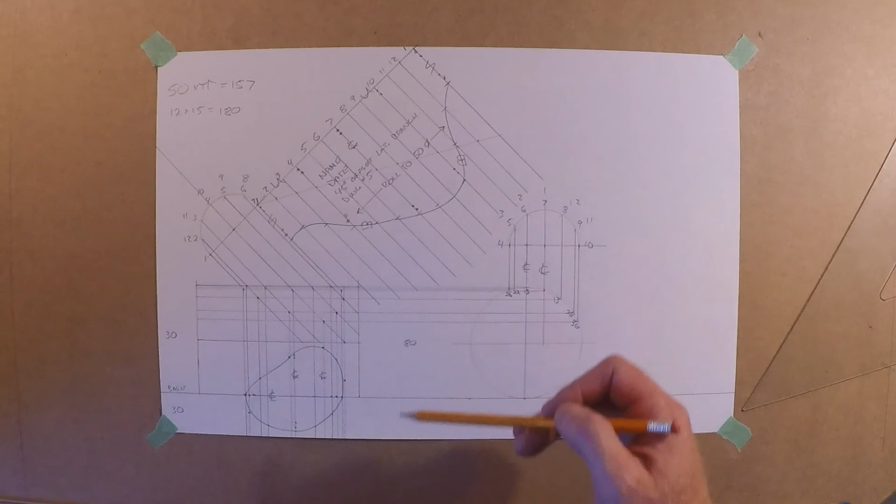I don't have the hole pattern on me here right now, but I'll have to make one, I guess, on the computer because I don't have one. And that's it. Drawing 5. That's complete. Alrighty. Thank you.